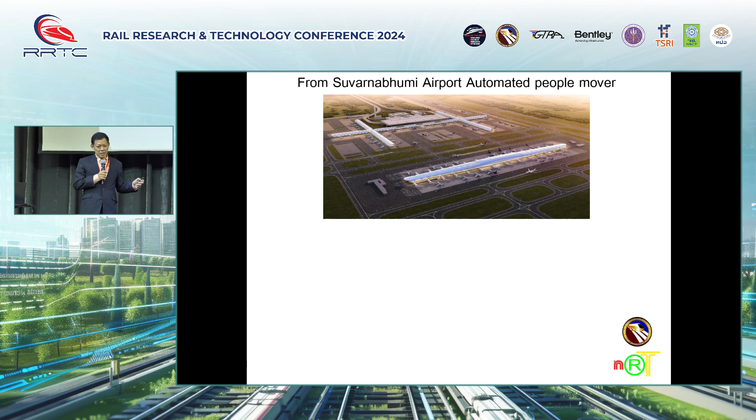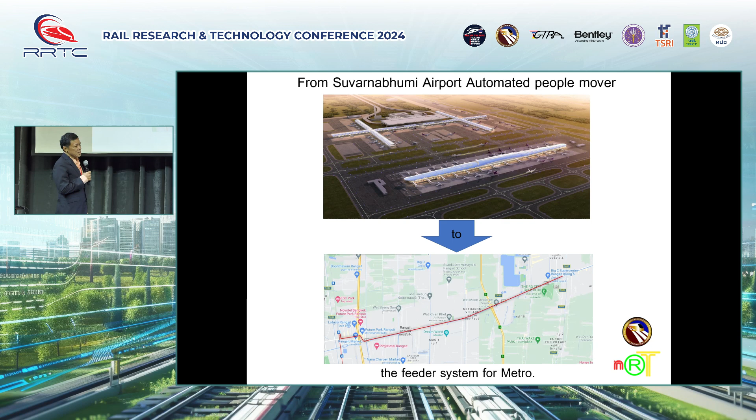In the topics I want to address, we want to expand the capacity and competency of the people mover to the metro. I used to present this at the Pacific Rail last year about implementing this system to the Pathum Thani province, but it didn't start yet.

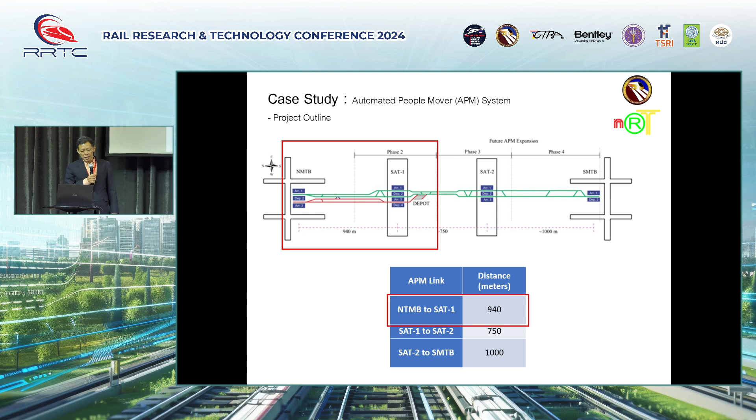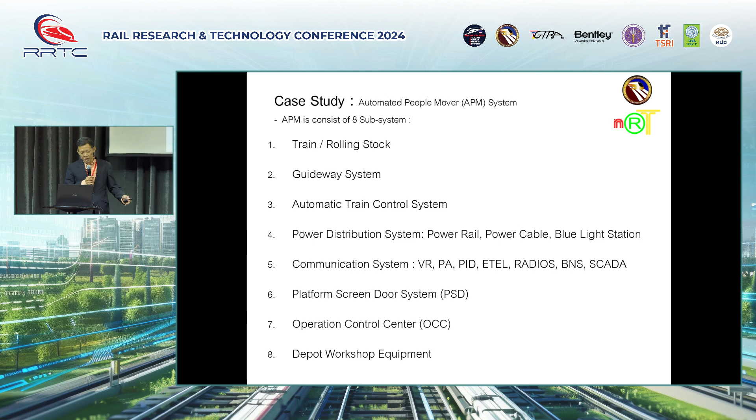I will skip some systems that are the same as the gold line. The APM Suvarnabhumi is the train link between the existing terminal and the new satellite terminal. The length between these terminals is around 1 kilometer. The subsystem is quite the same, not only the gold line, but the APM is quite the same as the railway in Thailand. So we have train, guideway, ATC, power, communication, PSD, OCC, and depot. It's the same.

I want to compare the Siemens train and the Bombardier train, but now there is no more Bombardier, it's Alstom. It's quite the same, but the standard is quite different.

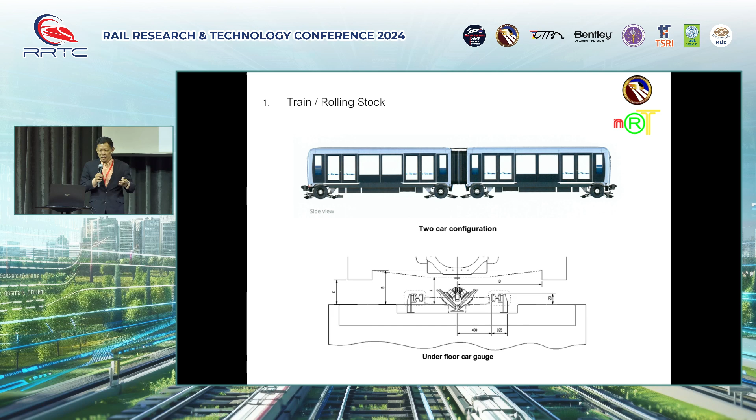Actually this APM, the airport APM, was developed by designers in the US, because in the US the airports are quite big, so many designers and standards are from the USA. But this project brought the European train from Siemens. It would have been better if, during the bidding time, we discussed with AMR to join, but finally we could not, so we implemented the Siemens train.

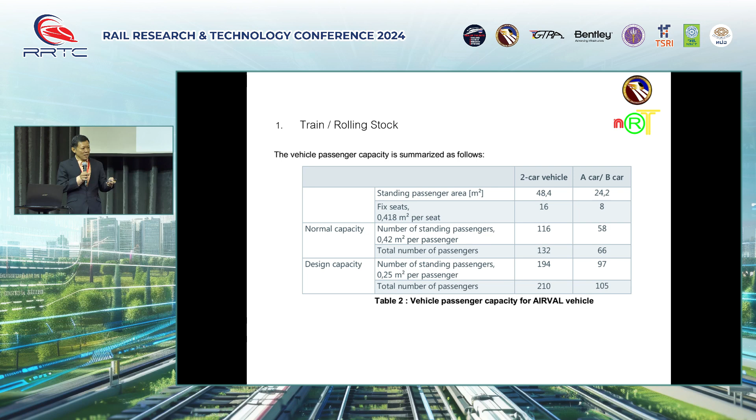Actually the Siemens train is very nice, as you know, we have it in the BTS line, MRT line extension, many of them. And in this project also they introduced very cutting edge technology. But with the very new technology we have some problems because of the many sensors, sometimes about the run-flat situation. With Innovia, we do daily inspection, but for Siemens we don't need to. We use sensors, but sometimes the sensor has a problem - they show that the tire is run-flat, but actually it's not.

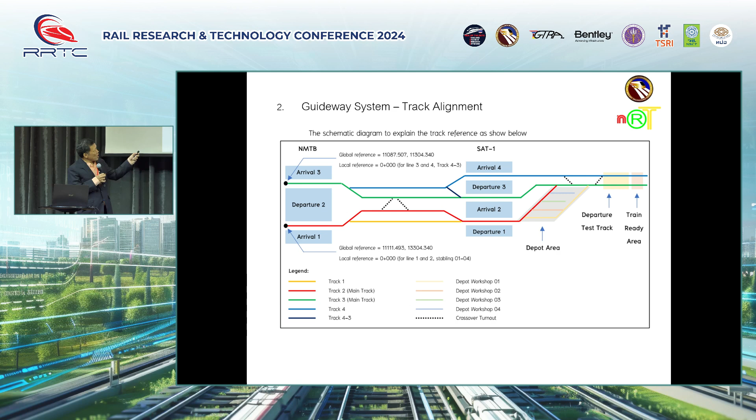I think some people here can use it already. Okay, this is the guideway. The length of the guideway is quite the same as the gold line. We do the guideway around 5.5 kilometers, meaning we have 2 loops, and we have the depot, and a test track also.

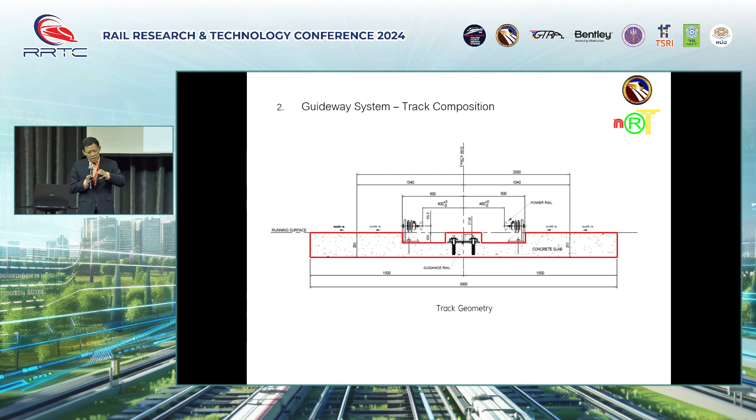This is the section of the guideway, different from the gold line as P. Malut said. In this project, we did the track work, the trackway, by ourselves. We had some problems - in the spec they mentioned about the test. Finally we went to Naresuan University to do the test for our surface. This is the finished surface that we did.

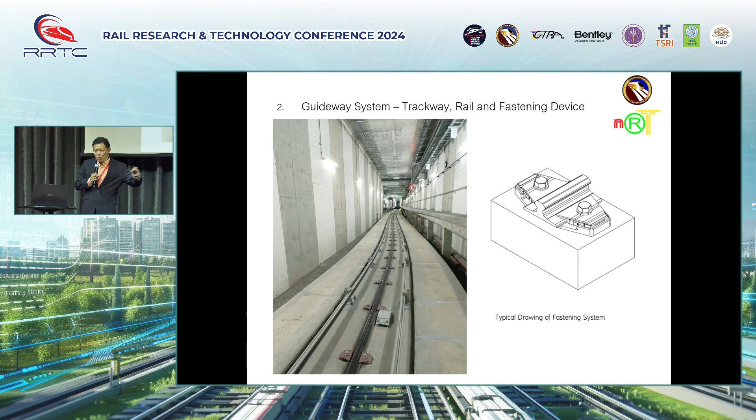We have to make sure it's not too smooth or too coarse, so we have to do it in the middle. This way is quite difficult to finish the surface because it is for the rubber tire - if you do it very coarse, the rubber tire will wear very rapidly.

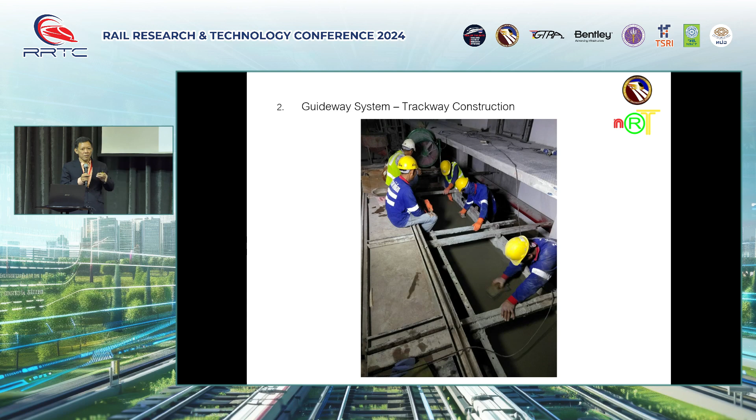This is the installation of the guideway. It's quite different from the gold line which uses an I-beam, but this one is a specific rail from Belgium.

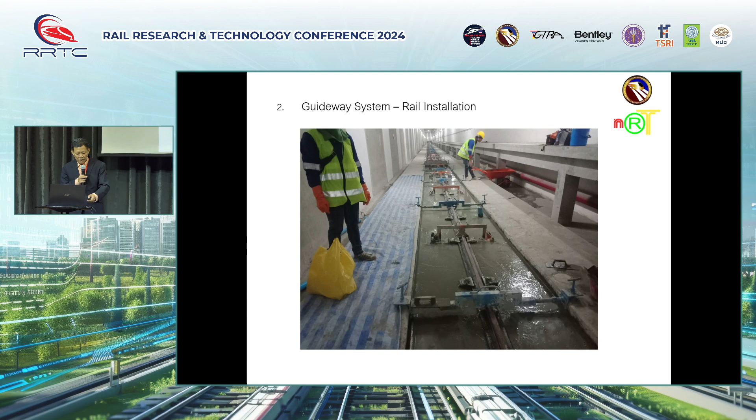Sorry, I think we're moving too fast. This is a switch that we brought from Oslo, from Strasbourg.

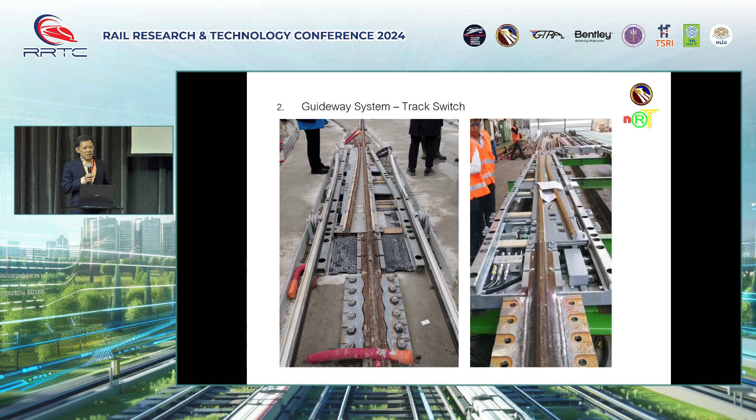In this topic we discuss local content, which is quite difficult in the railway. I think the network TRRN wants to expand or enhance our capacity for local content.

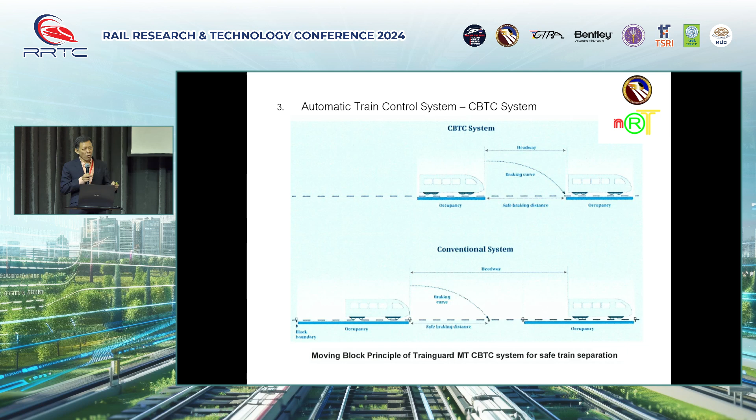So the CBTC is the same as the gold line - it's driverless GOA4, and everything is quite the same, so I will not go too much into it. And this is the power rail for the rubber tire, because there is no steel wheel, so we have to return the current back to the source. So we have to have a third rail and fourth rail.

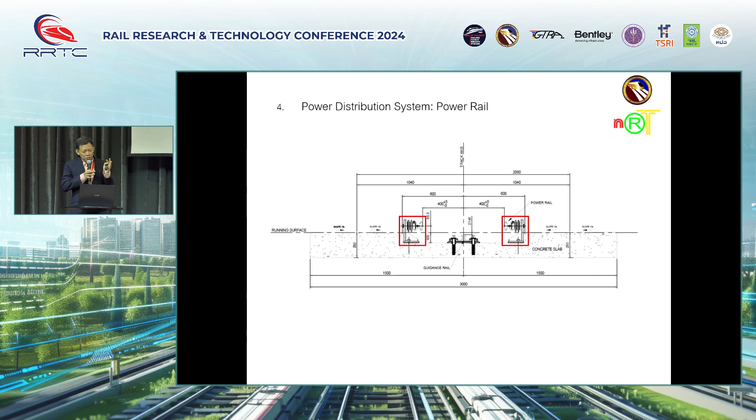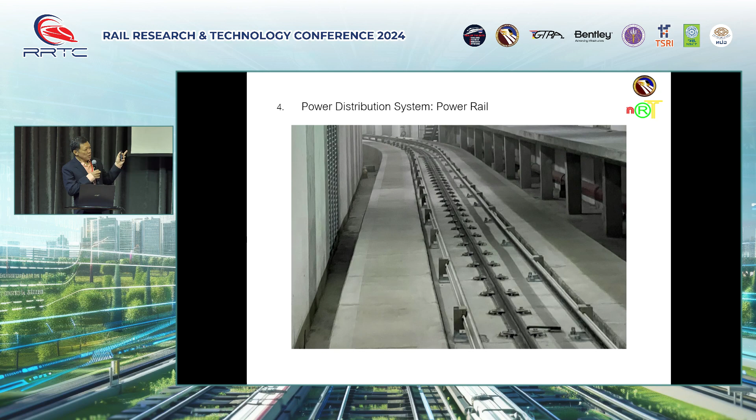This we bought from Rehau, Germany. And this one is the power distribution that we install. As you say, it's very dangerous because once we operate, we cannot let people into the area.

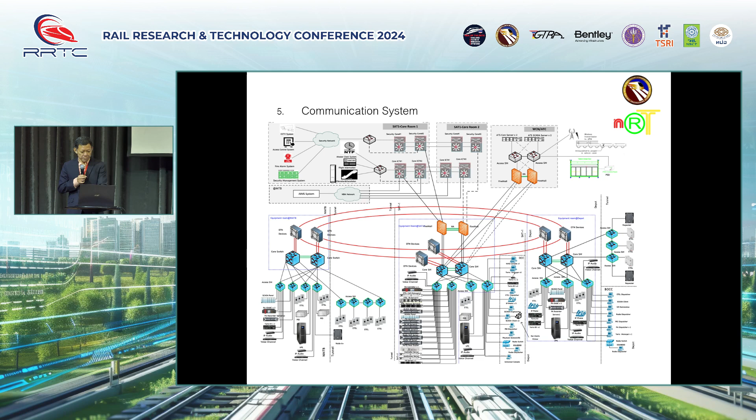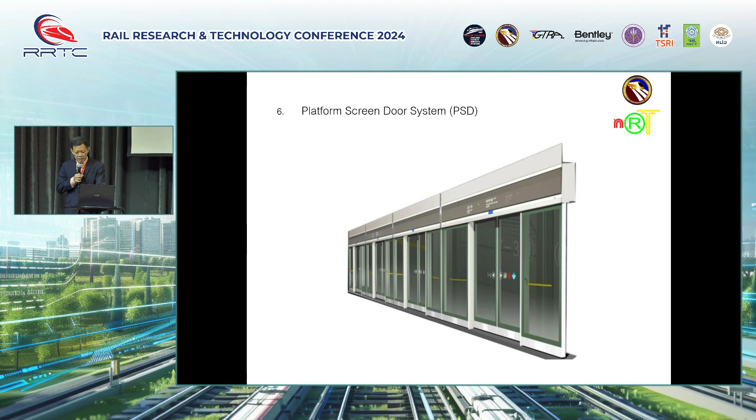Different from the gold line, we have full height, not half height platform screen doors. We have the full height because for GOA4, it is the regulation that if the GOA4 is driverless, every station, every platform must have the PSD.

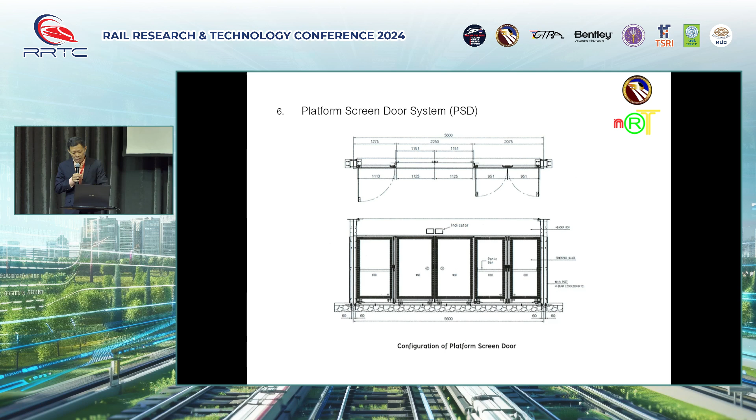This one is the layout, the drawing that we designed, different from others. We have the emergency door, we don't have the fixed panel. Once we have an emergency incident, we can push every door from the operation side. This one is the OCC, designed by Siemens, about the ergonomic system.

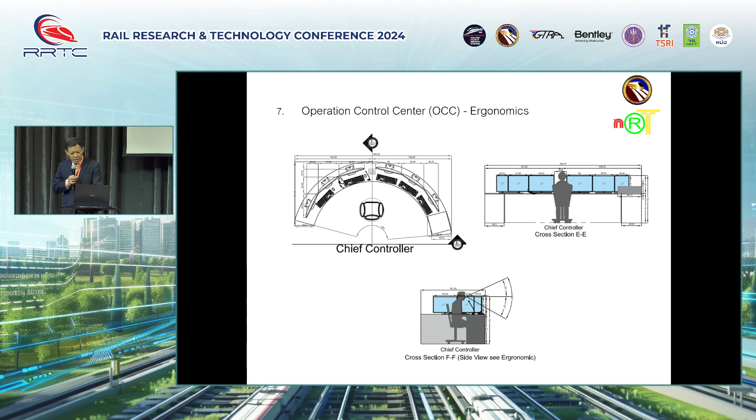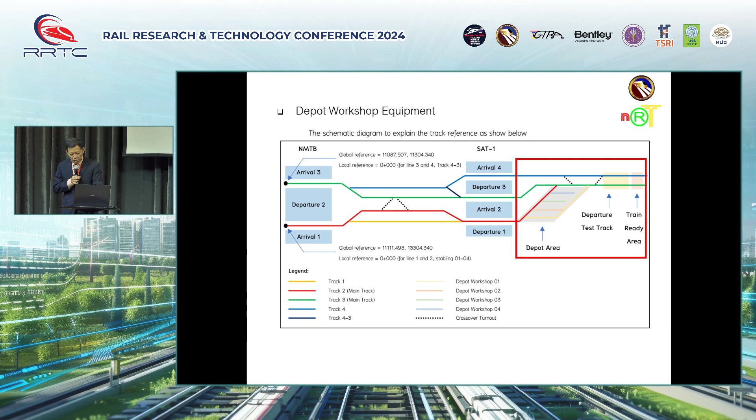This is the depot workshop at the area at the end of the line, after what we call the satellite one. This one is different from others because we designed it ourselves. We use the bus washer to implement to the system.

We designed it and requested approval from the designer and the customer, and finally we got it. It's different from a normal train wash everywhere, because in a normal train wash, the machine stays and the train passes through. But in this one, the train stops and the train wash machine is moved.

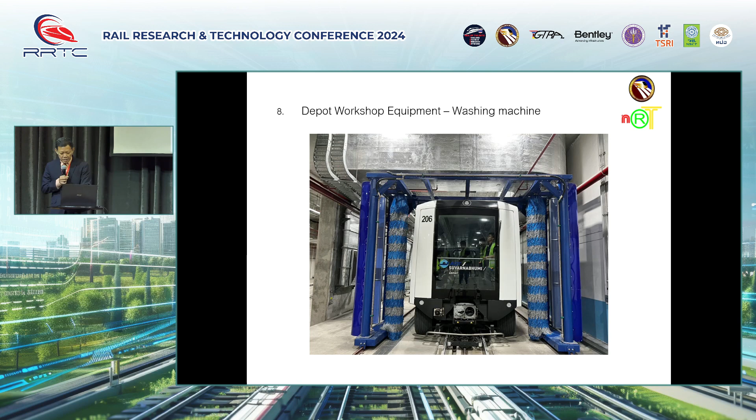And this one is the MRV, maintenance and repair vehicle. We joint designed with the Korean supplier, because this supplier supplies the MRV, the working train, for the pink and yellow lines.

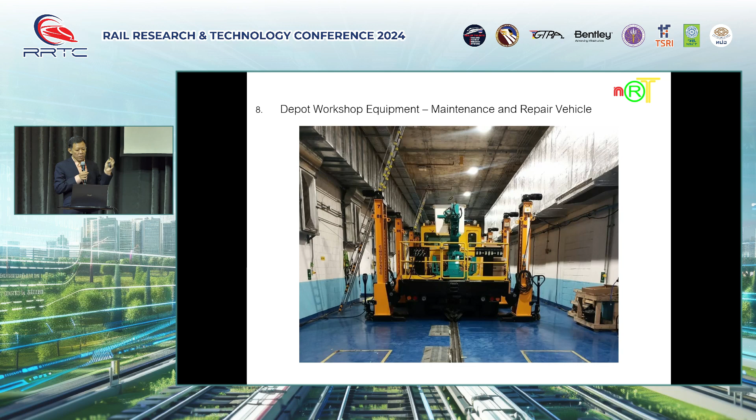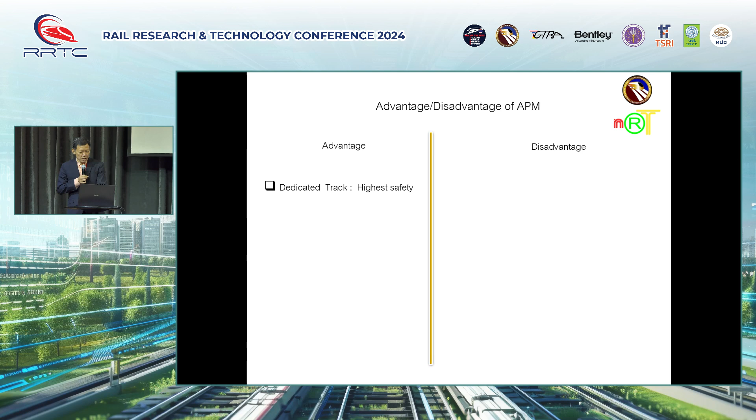Okay, I want to express more about the advantage of the APM. We have to do the dedicated track, but the cost is higher. It's driverless, so we don't need a lot of drivers. As you may know, the operation cost is mostly the hiring of the driver, so driverless is a complicated system.

In the beginning, we had some problems because we use the frequency of the Wi-Fi to carry the information of the train, and we had some interference from the mobile operator. Finally, AOT made the decision to remove the mobile antenna. So it's quite simple, if you use the very simple one, it may not be a problem.

And rubber tire's advantage is good acceleration. Like the station, you can shorten it to less than 1 kilometer, like 600 or 700 meters, and you can move from the first station A to station B, and the braking distance may be shorter. But with the rubber tire, you have a problem because sometimes the rubber tire runs flat, so the structure gauge will be bigger.

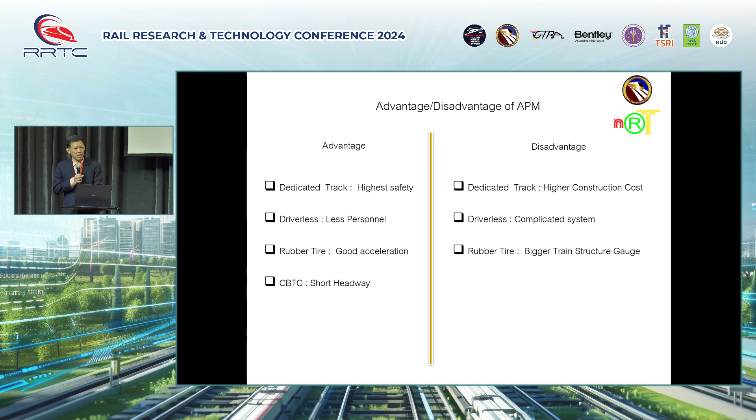The CBTC, as P. Marut said, shortens the headway, but it's more expensive. So PSD, as I told you before, in GOA4 the regulation requires PSD. So PSD adds to the cost of the system, and PSD is a moving part, so once everything is moving, you have to maintain it.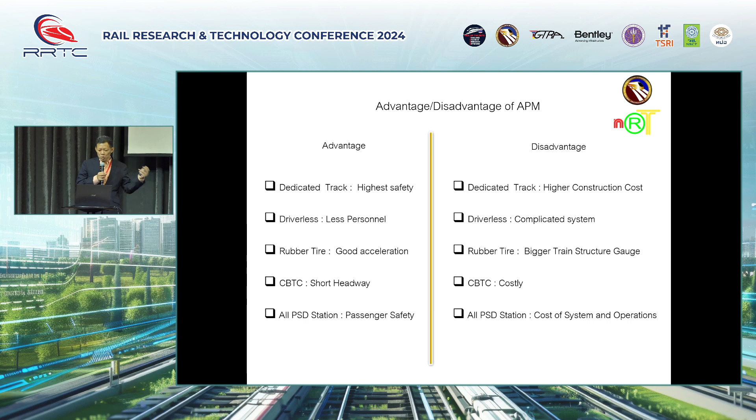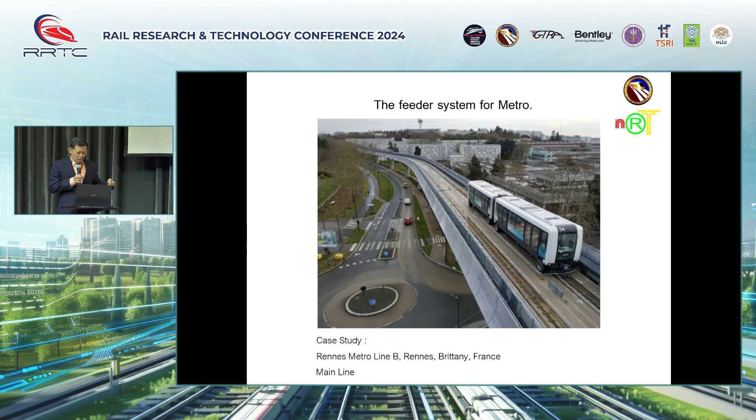This one is the feeder line at Rennes in France that uses the same model as the Suvarnabhumi. I think the shape looks nice, and I think that if we implement it on the road of Rangsit, Nakhon Nayok, I think it would be quite similar to this.

So this is my motivation to implement the APM and go to the metro. And I think the thing I want to express more about is local content—like from Gold Line and Suvarnabhumi APM, I think that we Thai people can do this type of train by ourselves. We need some researchers, we need some investors like PMUC, and we need some cooperation with users like urban areas, like Pathum Thani province, something like that.

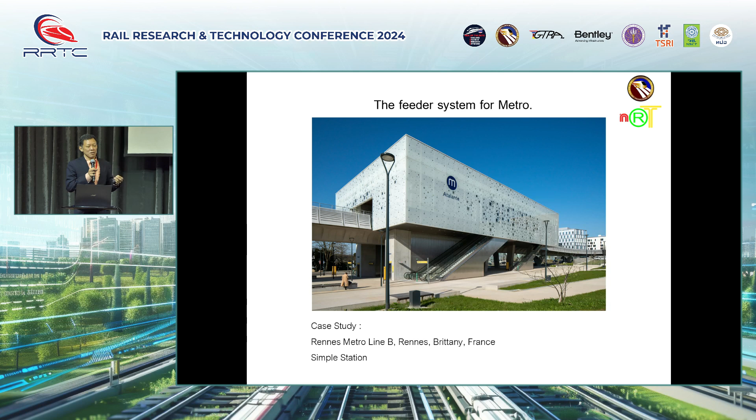So actually, if some researcher or someone wants to work together with me or my team, we can work together. Please contact me after this. Thank you very much.